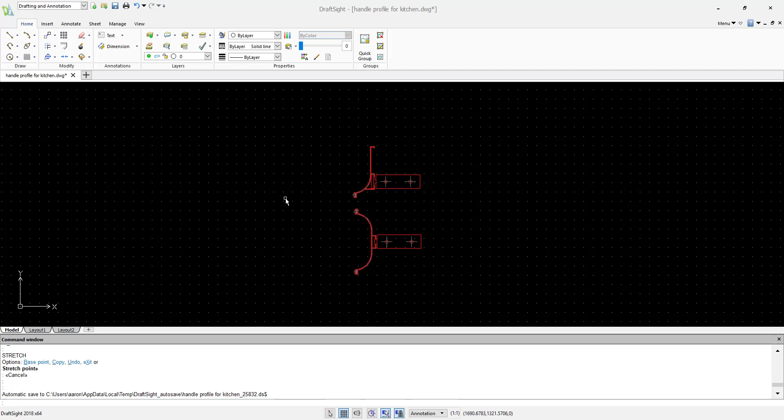Hello everyone, today we are going to do a video on how to import an AutoCAD file into PYTHA. Over here we have a kitchen handle that we want to import in. I'll take the top as an example.

We open up PYTHA, go to File, Import DWG, and select from our desktop the handle that we want. Over here we just delete the bottom because we're not interested in that yet, and now the top.

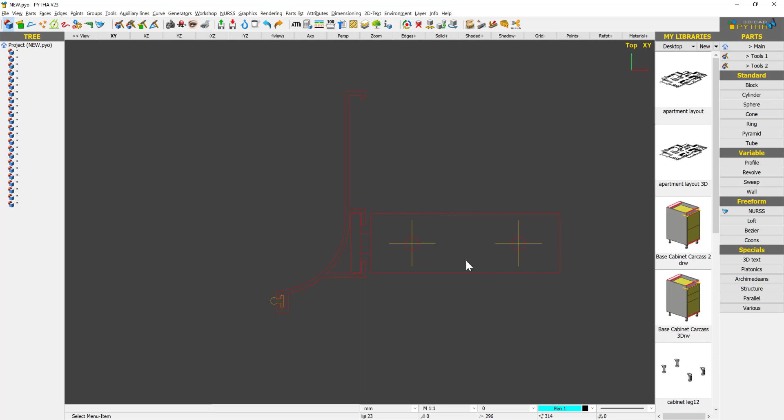First we'll test the lines. When you right click on the line, these are solid. This is good, so immediately I can go back to my Axo view, go to Parts, Profile, Edges, and click on this edge. It becomes a solid. I'll say that this is maybe -3 to the bottom.

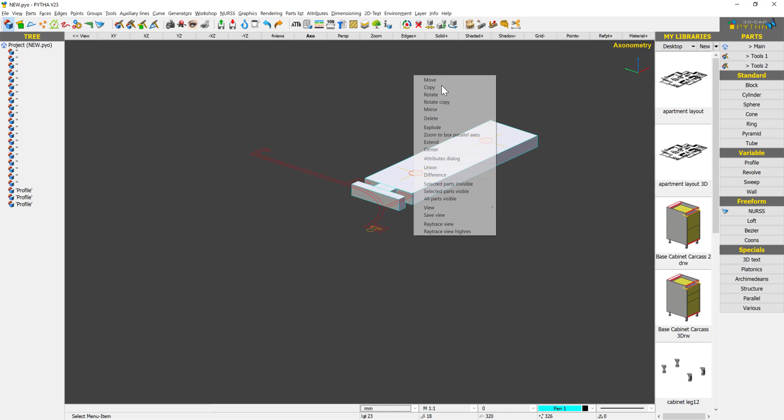And I'll also extrude this, about 3 mm. Then I extrude this line 3 mm. Okay, and over here now I'll say Union, so that I join the three cubes together.

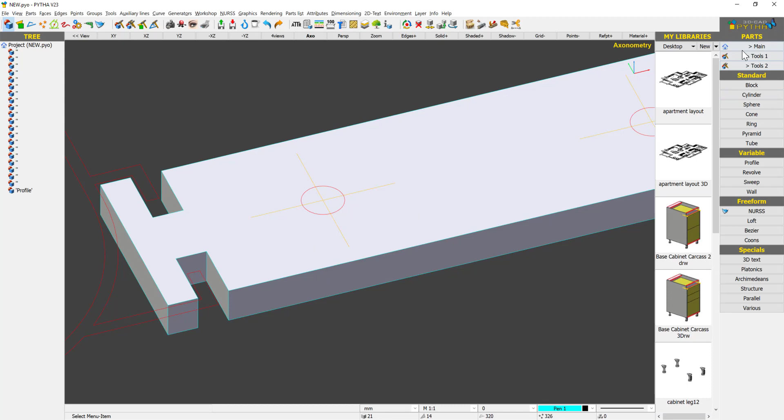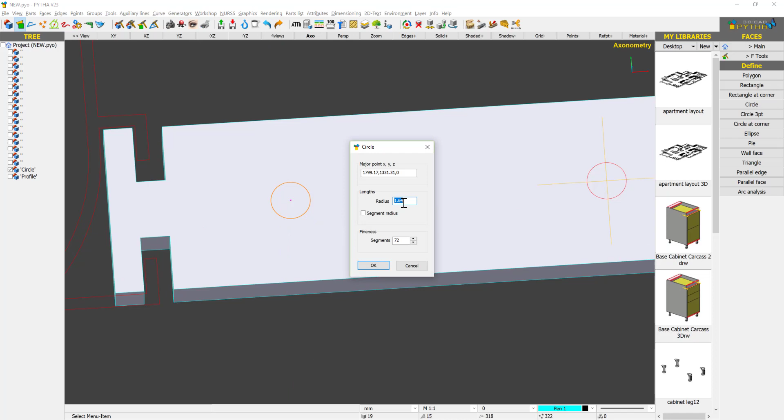Okay, and now right now we are able to say right click, edit, and say that this radius is 1.5 instead. So it's a diameter 3 circle.

Next, we are just going to copy this circle. I press G to hide the triad so that I can select the reference point, and I move it to this side. And then now I'm just going to do the same process to delete this, uncheck the circle. Done. The AutoCAD lines are deleted.

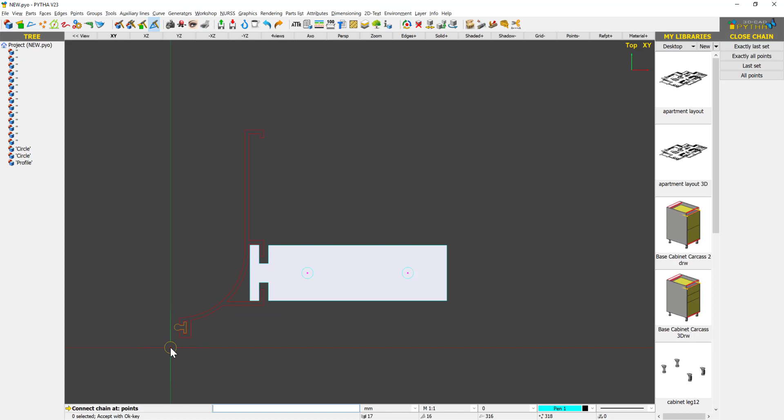So over here, right now at the top view, you see all my AutoCAD lines are individual. So I don't want them to be individual. I'll say Parts, I'll say Edges, and I will use Close Chain, and select everything. Now PYTHA closes the chain.

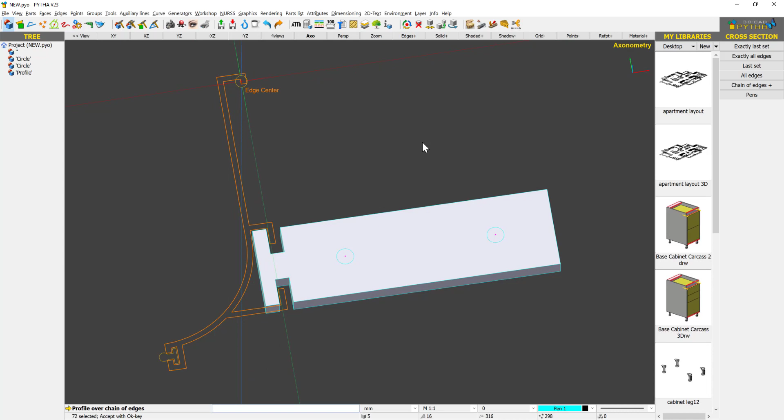So now if I were to go to Parts, Profile, I'll say Edges and click this. You can see that there's some issues with my AutoCAD line, that the lines are still broken up. Despite pressing Close Chain, it's not a solid, so there's issues with this line.

And we will have to retrace this line. I'll show you how to in a short while.

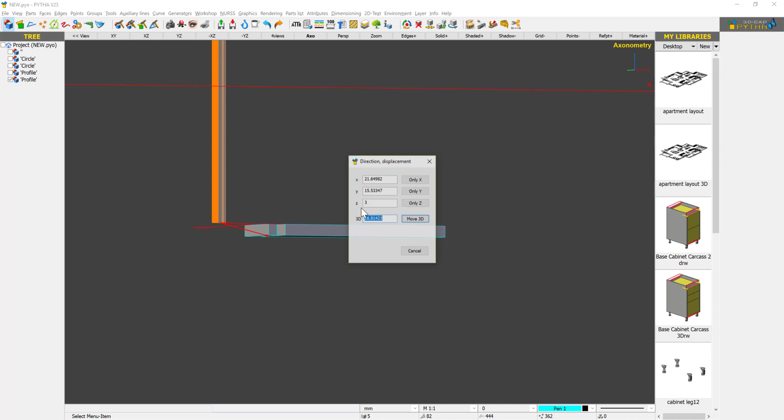But I will extrude the other edge over here, about 50 mm. And because this, I'll move it down, such that it's something like this.

So now we have a profile. So what we need to do is to trace out this profile. First I will say Selected Parts Invisible, because I want to hide my solids that I've been able to create. And now I'm going to trace out this profile.

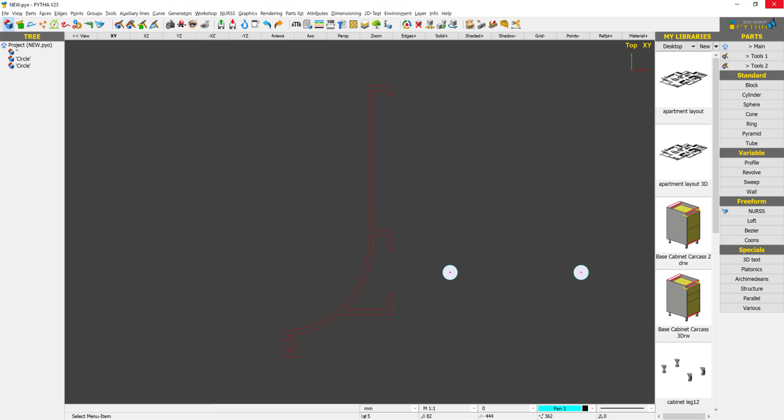How do I trace out this profile? First, I'm just going to trace this line. So I'm just going to go into Faces, 3-Point Circle, click here, click here, click here, I get a circle.

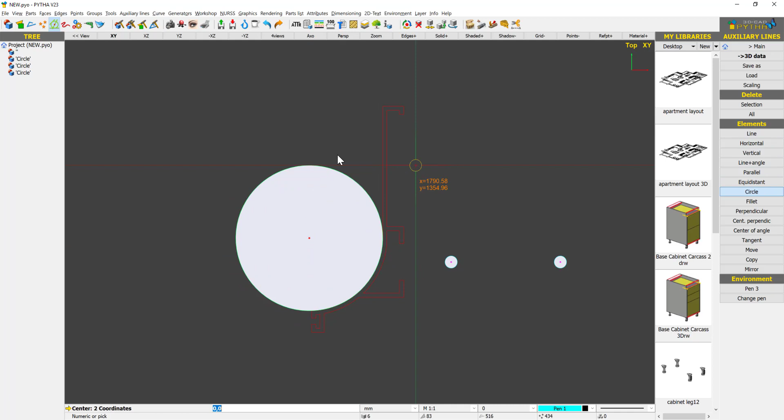Then now under Main, we go to Auxiliary Lines, and we try to trace out this line. But first I will convert this circle into an auxiliary line by clicking on circle to retrace this face that I created. And then I'm just going to delete this circle that's a face.

Okay, and I have an auxiliary line. I'm going to use the command Parallel to say it goes out by 1 mm. Okay, so I'm just going to delete this.

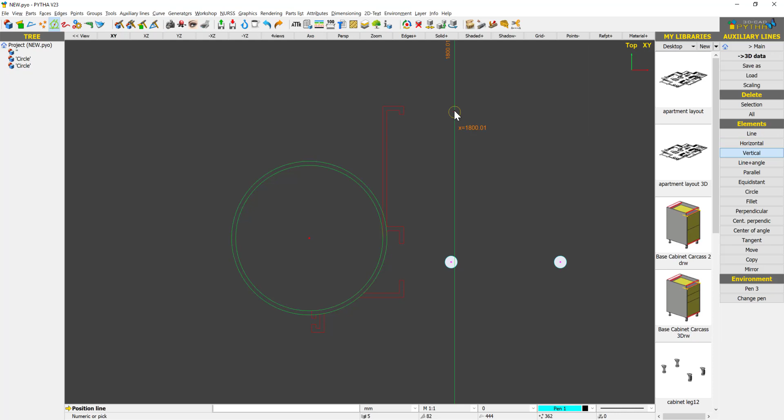And now for any circle that starts and ends, I'm just going to do a vertical line. Click, click, here, and here. So we have some vertical lines that we can trace.

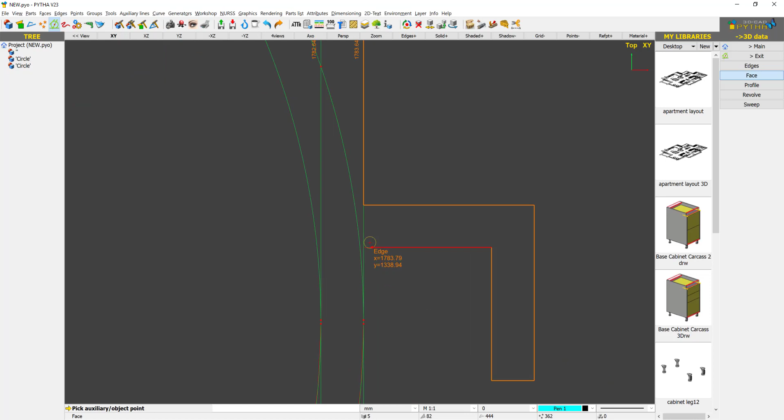So how do I trace? I go to 3D Data, Face. I click on the start point, left click, and start tracing. Left click, left click, click, click, come out here. Okay, so I click this point and I click one of the red dots.

And how do I trace a circle? Move your mouse such that you see a command called Auxiliary Circle. I'm just going to move my mouse and make sure it says auxiliary circle. I can zoom all the way in, click once, zoom out, come down here, and click on this point. So immediately PYTHA traces a circle.

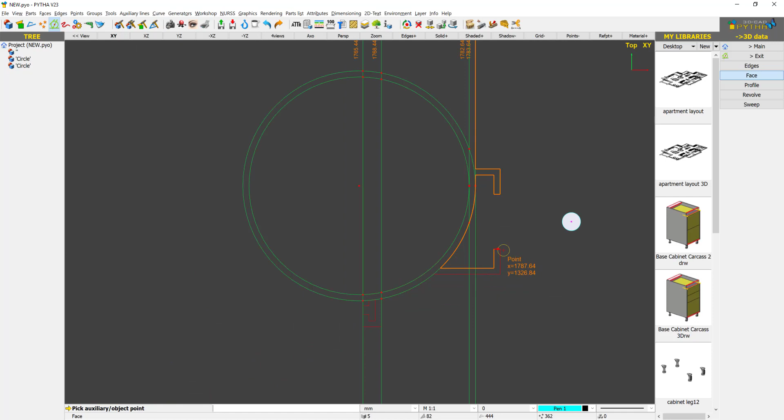I'm going to show you again. So I'm just going to click, click, and come back to here. We're going to zoom in, click on the green circle that says auxiliary circle, click once, left click once, and now move to click on the endpoint, which is this red dot.

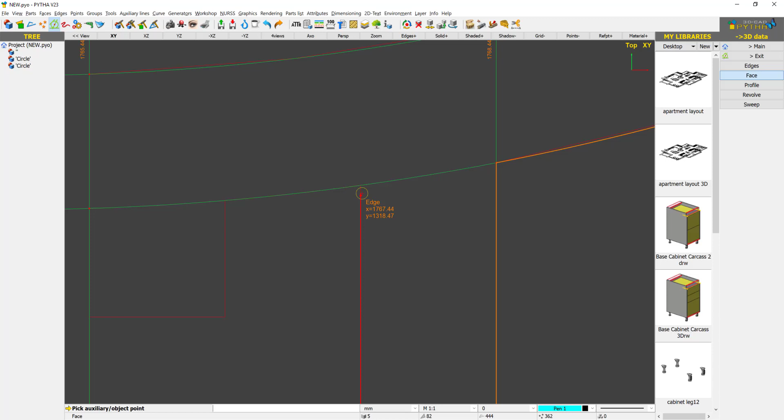So this is how you trace the AutoCAD line. If your AutoCAD line is okay, you do not need to trace it. We are tracing this because we are not able to explode the original AutoCAD file.

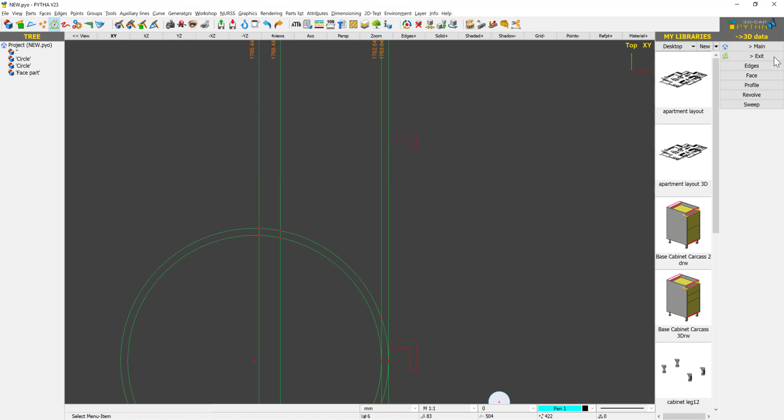I'm just going to auxiliary point again, zoom in to a circle and end it off at the red dot. Move it up here. Once we have a face, we can go exit, main, and we have a face here.

I'm just going to delete this, and I'm going to uncheck the face so that the original AutoCAD line is deleted. Next, we are going to go all parts visible.

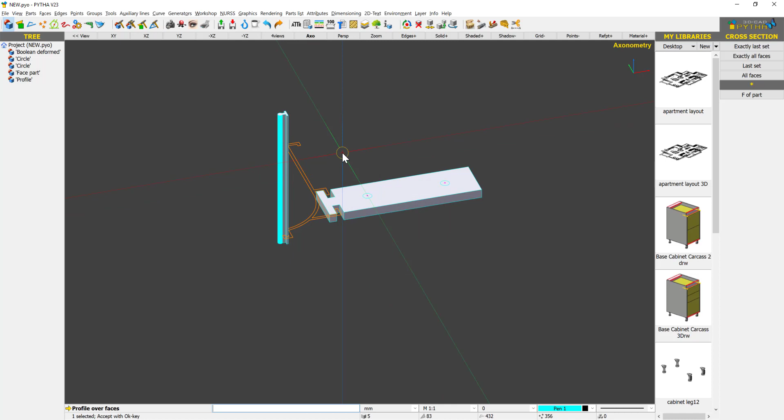Now I'm just going to go into parts, and we are going to use the command called profile over faces. Click on this and say that this is 50 on the outside, and we are going to move this also downwards in the Z.

So now we have a part like this, and next we are just going to copy this circle all the way, this panel all the way up, so that there is two areas here.

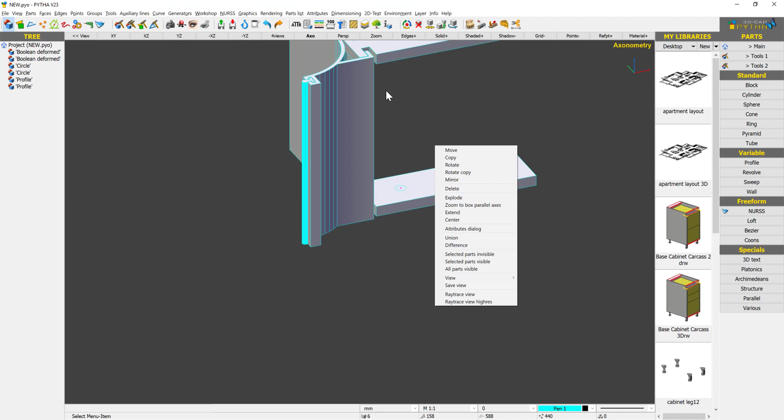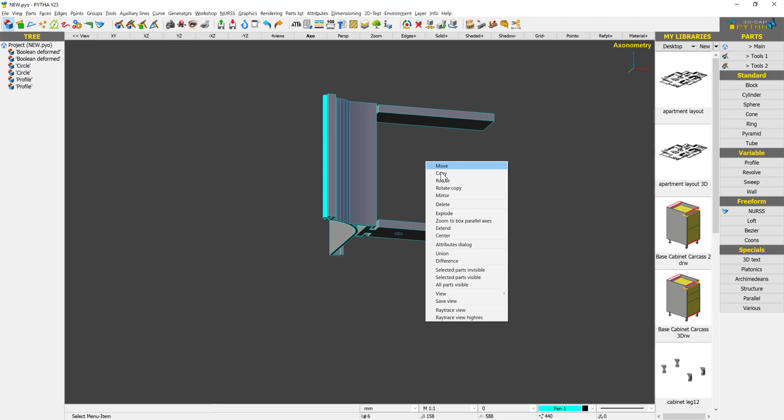For this circle, what we are going to do, we are going to move this circle downwards, so that it will create a drilling command. Then I'm just going to copy these two circles from the bottom to the top in the Z direction.

Then what we're going to do, we're going to go workshop, my holes, we're going to select this 4 circles, 2 and 2, so it's 4 selected. Enter and say that for this I want a pre-drill, I want the system to drill a hole, and maybe the drilling depth is only 5 mm.

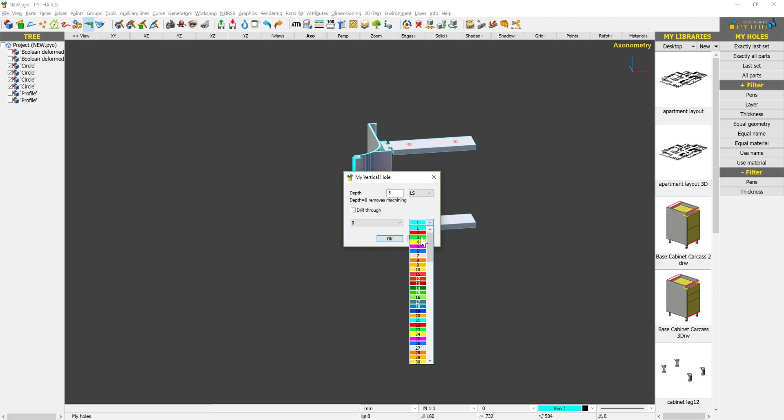I always like to make my holes red so that I'm aware that there's a machining command. What am I going to do now? I'm just going to rotate this figure.

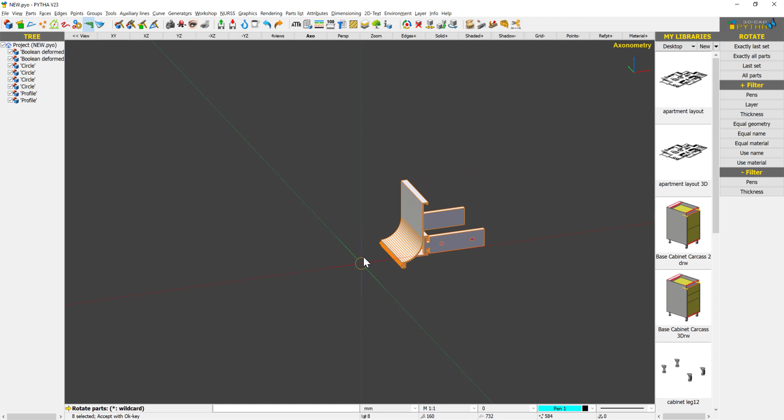I want to rotate it such that it is how we would just insert it. So I'm just going to rotate in this direction, and I'm going to rotate again in the Z by 90 degrees. So this is how we would have inserted the handle.

Usually I like to just move the object back to the origin. Next we have to ask ourselves, where is the insertion point? That is very important. We assume that for the cabinet, this is the side of the cabinet that we are going to insert.

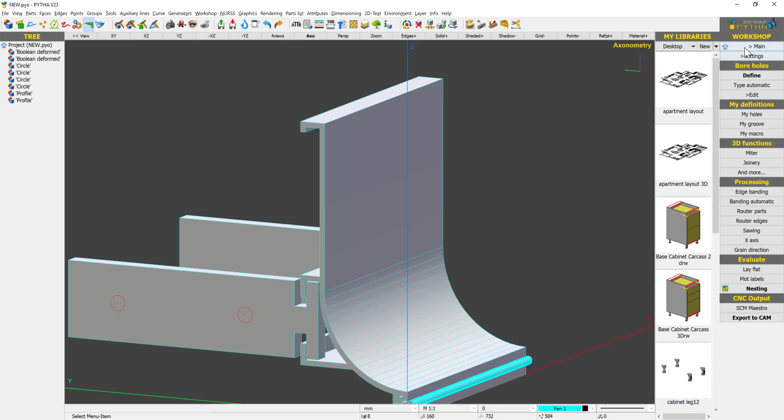So what we just need to do, first we will group them together. We're just going to say group parts, and we select everything, and we say that this is a handle, for the top.

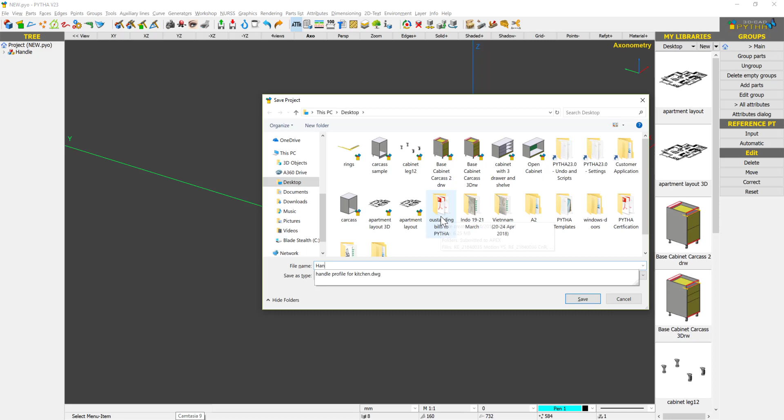Once we say that this is a handle, we can just save this. I'm going to save it on my desktop, handle, kitchen.

Next I'm going to create a point. I'm just going to go attributes, under group you say reference point, input a point somewhere along here. Maybe I'll say that this is usually where I'll put the

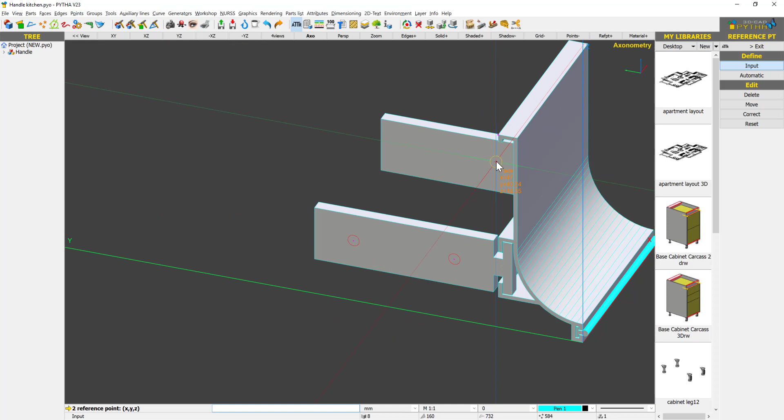profile. And I can say extend this figure, extend this assembly. I'm just going to pull it out a little bit more, maybe by 400.

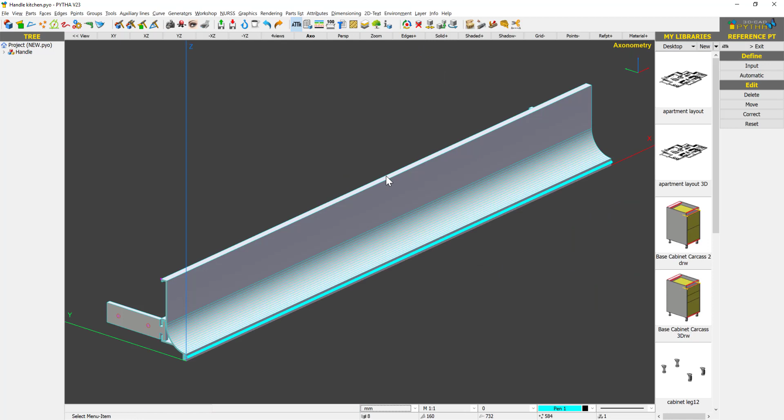So once we have a handle, we go into file, new. If I have a carcass like this, how do I put in the handle? Let me just delete the yellow boxes.

To put in the handle, all we need to do is just go under my library here. If I refresh my desktop, you'll see the kitchen handle. I just drag it in.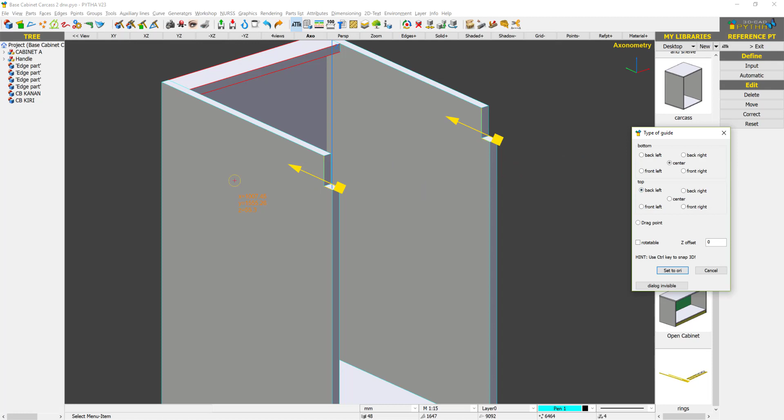So I have the handle here. I can say top left, and I can press Ctrl such that the system applies. So I can just insert it here, and from here we are able to move this group.

Make sure the group is plus. Move it as a reference point backwards. And then over here we just say extend. Make sure the group is plus again.

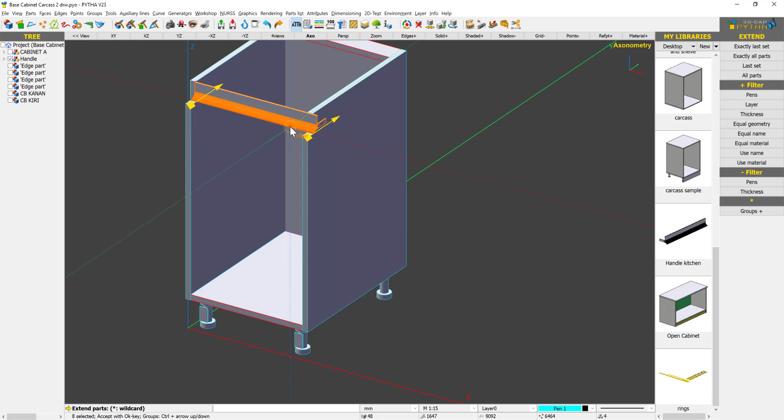Extend it from here to the inside edge in the X. So immediately you have the handle.

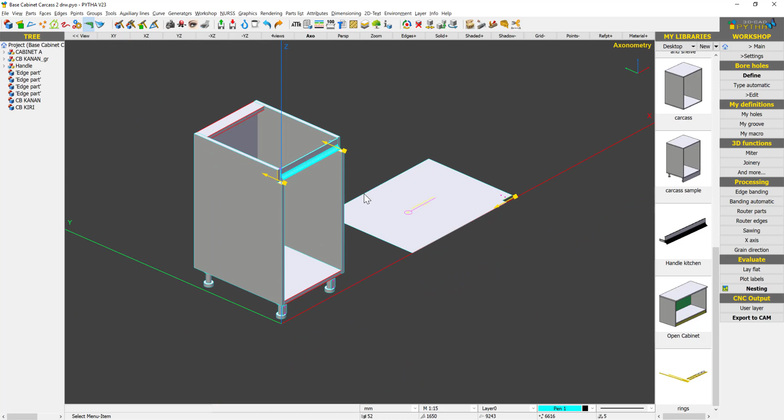What do I mean by the machine profile? So let's say if we were to go into workshop and we say lay flat and select this panel, you'll notice that there are two holes here, and these two holes are the profile for this handle.

So this is how you create such a profile for the handle. So this is how, if you have AutoCAD lines that you have trouble importing, you have to do this retracing of this part. Thank you.